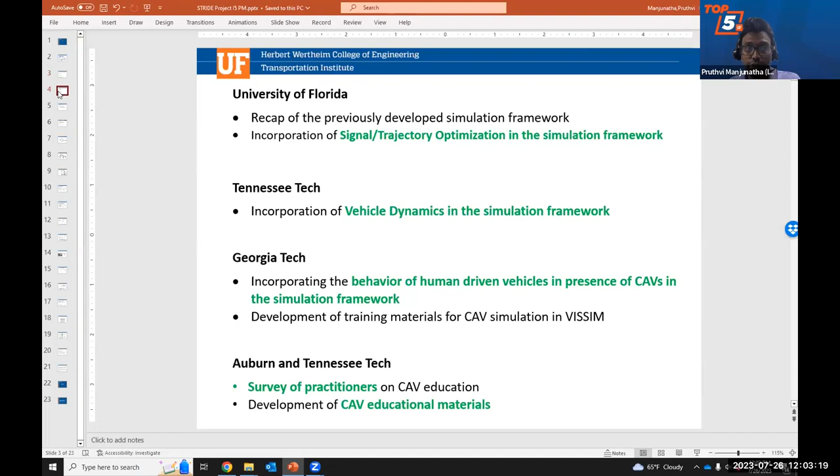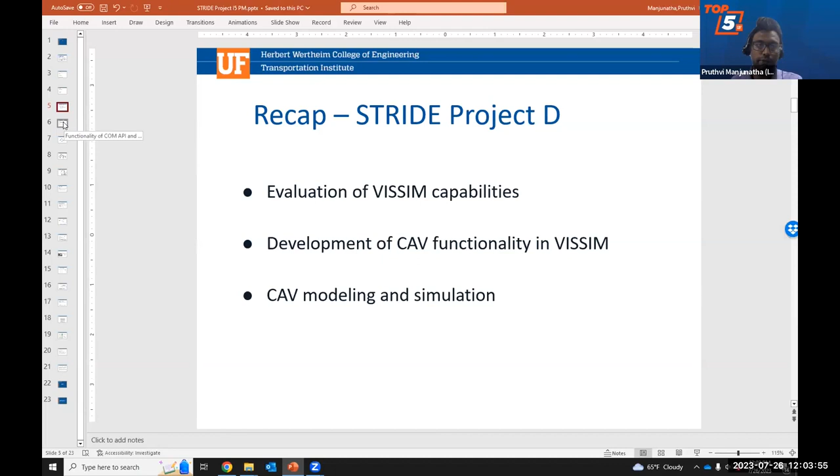This project builds on an existing VISSIM simulation framework that we developed a couple of years ago. So when we started that work, the idea was to evaluate VISSIM capabilities and see how best we can model CAVs in a simulation framework using VISSIM. What we found was, we can take advantage of 2 functionalities that VISSIM offers. One is the COM application programming interface, and second is the external driver module.

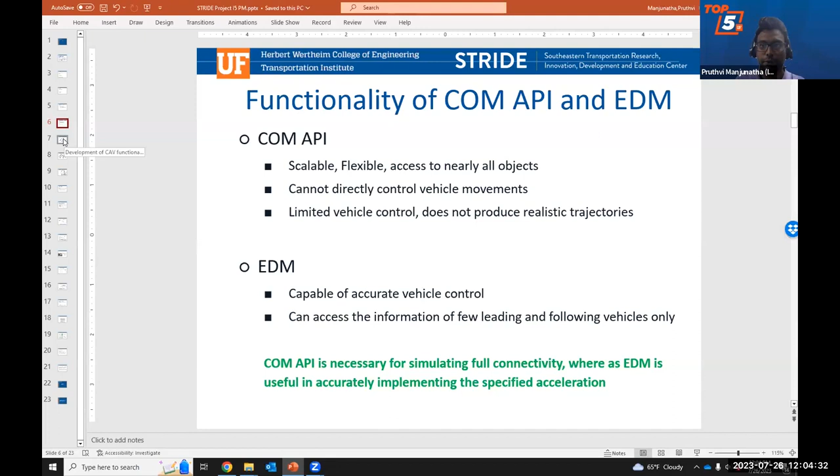The COM API is helpful to access all the network elements during the simulation, whereas the external driver module is very good in accurately implementing specified acceleration or speeds for a given vehicle. So using a combination of the COM API and the external driver module, we came up with this framework for simulation where we capture all the traffic data using COM API every simulation second or interval. And then we feed it into whatever AV or CV logic one would like to run.

And then the acceleration for all the vehicles that are being controlled would be inputted to COM API and then written into a text file, where the EDM picks up the text file and implements that for those vehicles every simulation time step. So this is the basic framework.

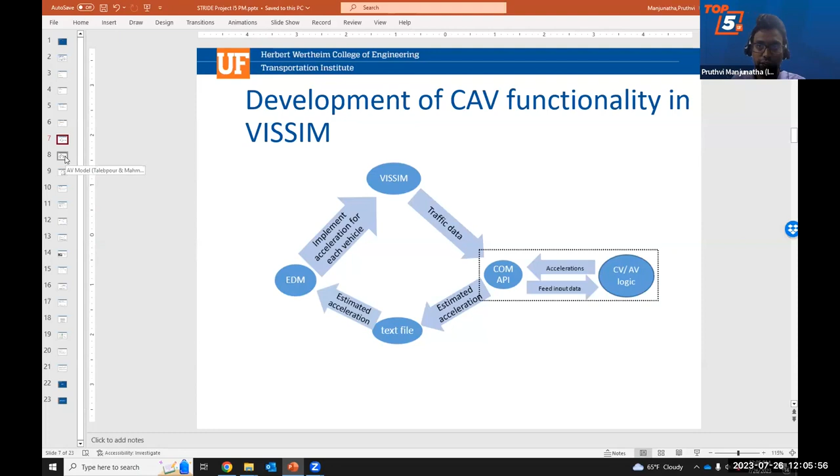So we started with this simulation framework, and for this particular project that we're going to talk about today, we had 3 different types of upgrades to this simulation framework. When we completed this evaluation, at the time, we just used an AV model from the literature and then a CV model based on what PTV had. And we ran this in conjunction with an emissions model that was developed based on the MOVES model by Georgia Tech. So that was the previous project.

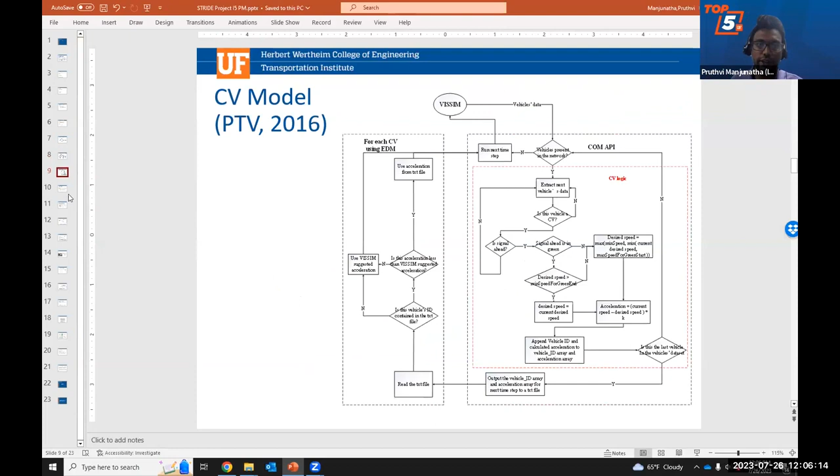What we did in this project was we added the signal and trajectory optimization component, we added the vehicle dynamics component, and we added the human behavior into this. So first, from UF, I'm going to talk about how exactly we incorporated the signal and trajectory optimization into this framework. For this, we picked up an optimization system that we are familiar with because we developed it here at UF. So this is basically the signal and trajectory optimization framework.

There is a link to the published work if you're interested. Essentially, we developed this to be implemented in the field. We have actually done some field testing with this framework as well. The summary of this framework is basically there is the sensor fusion system that takes in all the information of vehicle arrival through different sensors. Once we have the vehicle arrival information, we have something called an intersection control algorithm that will do the optimization and produce optimal signal plans as well as optimal trajectories.

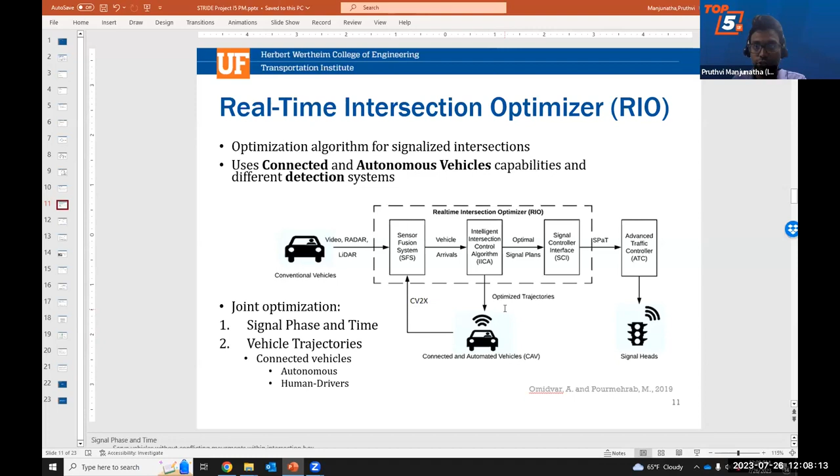So the optimal signal plan will be implemented at the signal controller, and the optimal trajectories are the trajectory recommendations sent to the CAVs. If we were to implement this in a simulation framework instead of the signal controller, we would be sending this to the signal controller within the VISSIM simulation framework. And the optimal trajectories have to be implemented in VISSIM using the external driver module because of the reasons I mentioned before. So how would we go about implementing that?

So this is how the modified or updated simulation framework looks like. We still use the COM interface to get all the traffic information and vehicle arrival information every time step into our optimization module. There are two types of optimizations happening: one is the signal optimization and the other is the trajectory optimization. The signal optimization is sent back into the COM interface to be implemented using VISSIM's signal controllers, and for the trajectory optimization, we write it onto a text file that gets picked up by the external driver module.

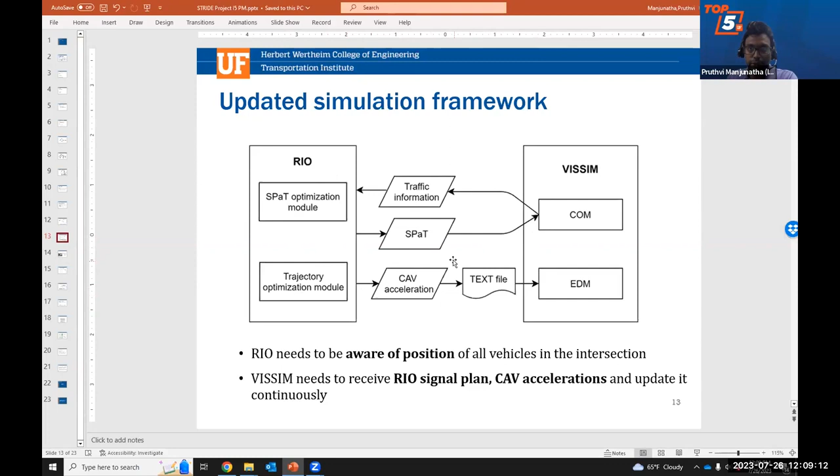So what are some of the challenges? To begin with, to make sure this particular framework is working, we used 100% CAVs to test as a proof of concept. We use the same four-legged intersection that we used in the previous project. To keep it simple, we just used a two-phase signal plan, and then we tried to compare the performance in terms of delay with VISSIM's signal plan versus an optimized signal plan.

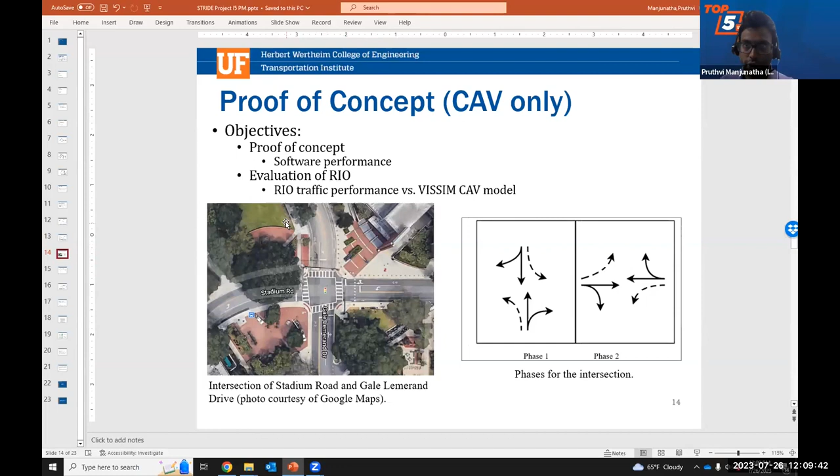This is what we had with the 100% CAV. So we had 6 different scenarios with increasing demand levels. First 3 are evenly split 50-50, and the next 3 are 70-30, with 800, 1600, and 2400 vehicles per hour as the vehicle network demand.

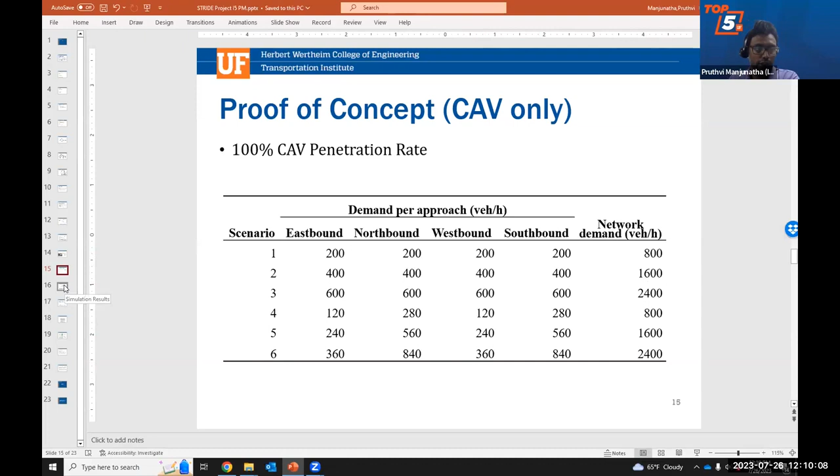So in terms of simulation results, for every single scenario we had an improvement in delay. Delay reduced in each of the scenarios with at least 30% improvement, and we saw more improvement when the demand was evenly split over a 70-30 split.

Some of the problems we encountered are like the simulation runs very slowly, sometimes at or even slower than real time. The reason is the way in which we send the information of vehicle accelerations from the optimization module to VISSIM is through writing on a text file. So that was the bottleneck that we found.

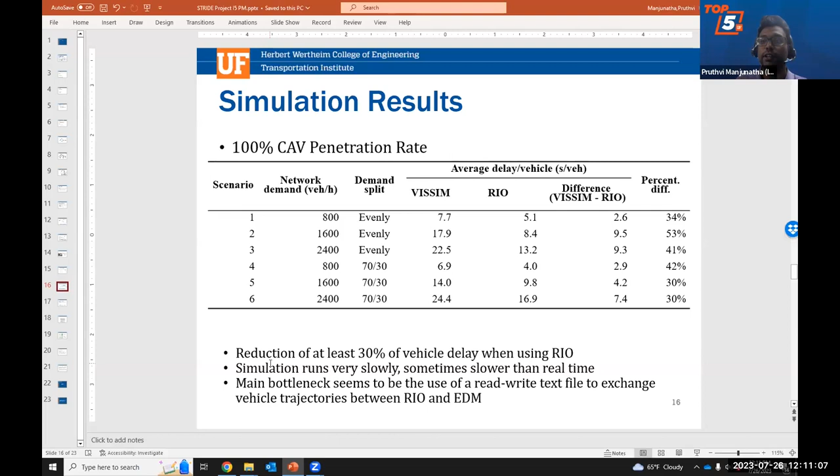So the next step was to now implement different combinations of CAVs, CVs, and conventional vehicles. What challenges would we face? There are a couple. One was that with RIO, because it was using an assumed car following model for the leader vehicle, I believe it was a Gipps car following model, it had a certainty of where the leader vehicle was going to be. Whereas in this framework, as long as it's a conventional vehicle, the vehicle type is defined as a conventional vehicle, VISSIM controls that, and there's no such certainty.

The second thing is within the optimization module, when the vehicle gets closer to the stop line, the optimization and iterations stop, and the recommended trajectories get locked in. This works very well as long as the vehicle is a CAV and it will implement the recommended trajectory exactly as prescribed, but it doesn't happen so with conventional vehicles that are controlled by VISSIM.

So the solutions were to keep re-estimating the departure times for those vehicles, and then adjusting the network state, and also not locking the conventional vehicles with a certain trajectory, no matter how close they were to the stop line. Of course, this meant more calculations and further slowing of the simulation speed.

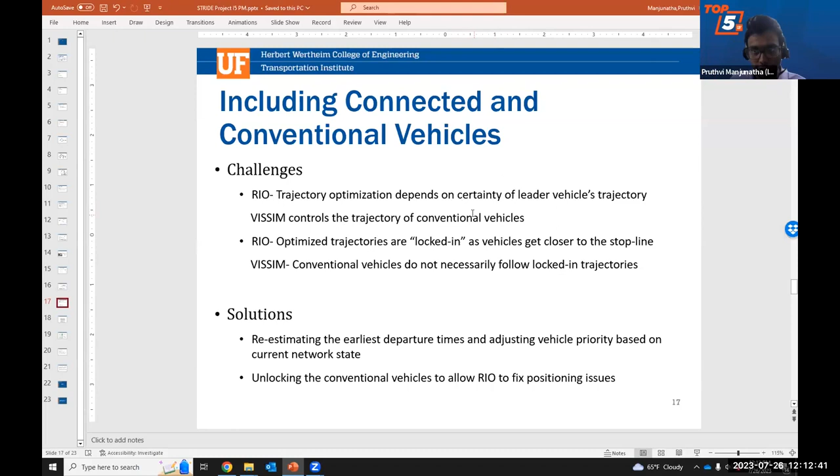To test this out, we came up with 11 different vehicle mixes with different percentages of CAVs, connected vehicles, and conventional vehicles, and 4 demand levels from 400 to 1600 vehicles per hour, and then 2 demand mixes, one even mix of 50-50, and then one at 70-30. This resulted in 88 different combinations, and each combination we ran it 5 times for multiple runs.

I have some results to show here. Due to lack of time, I'll only be showing one set of results, but I will highlight different findings from particular sets of results.

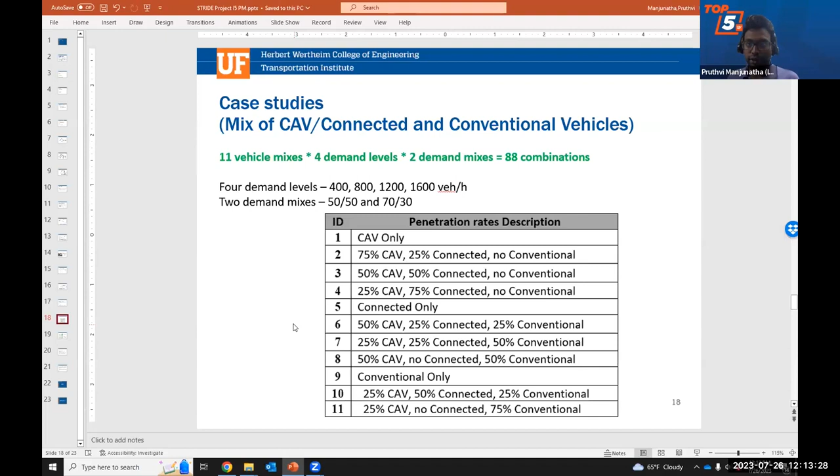One thing you notice on this table gives the delay difference between a VISSIM operated signal control versus RIO, or the signal optimization software operated signal control. When you consider the average improvements across all the scenarios, all 88 combinations that I mentioned, they're all positive. That's good news. There might be a negative in a few scenarios, reflected in the minimum improvements you can see on the left side, on the first column.

Some of that is because when conventional vehicles get stuck in a simulation, VISSIM has a 60-second rule where by default those vehicles disappear, whereas in the optimization it doesn't. So there's a discrepancy causing some bottlenecks and delay times not improving. We reran some scenarios with different random seeds so that vehicles stuck, which are not removed artificially like VISSIM does, are not counted.

In general, all the scenarios at the top of your table are CAV heavy scenarios. So the CAV heavy scenarios have better performance compared to other scenarios in general.

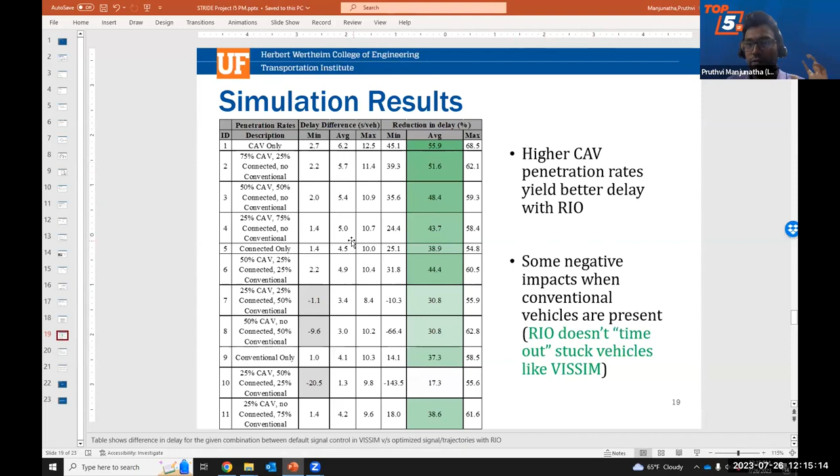Some other findings we found when we tried to redo this table with certain types of demands or vehicle mixes: in general, like we saw with the CAV only case, the signal optimization software works better when demands are evenly split.

Also, with higher percentage of CAVs, RIO performs better across all demand levels, irrespective of demand. Whereas when conventional vehicles are higher, the performance is only good at lower demand levels. So a mix of higher percentage of conventional vehicles and higher demand levels is not a good recipe to get good improvements with at least the signal optimization that we used.

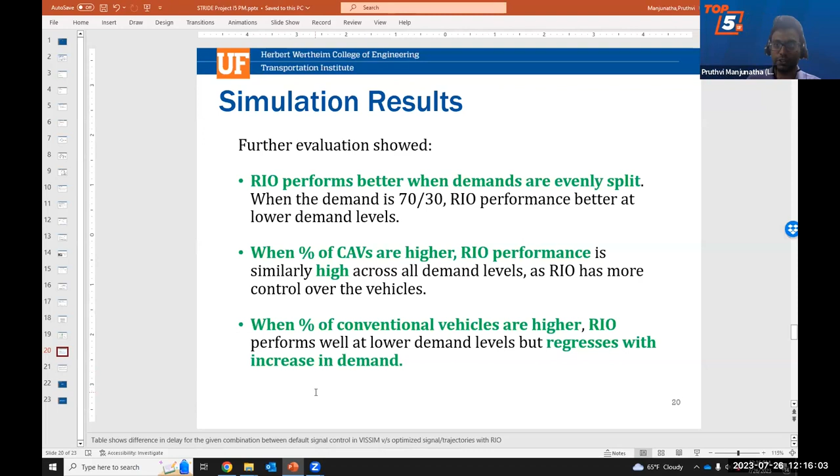So the conclusions from UF's work are: the initial implementation of the signal optimization module with the modified or updated framework is working, and we were able to successfully run with different types or combinations of vehicle types. The way we ran this whole system is very modular, so if someone wants to use their own signal optimization algorithm, they can use our existing modified framework and plug in their own signal optimization framework.

We did observe slower and slower simulation speeds as the scenarios get more complex. The main reason is our accelerations are being written onto a text file that has to be read by the external driver module. We tried to investigate whether we can do it in better ways. Due to time constraints we couldn't explore it further, and Georgia Tech helped us as well. We tried to see if we can use other functionalities that VISSIM allows to transfer information about vehicle accelerations from the optimization module to the EDM in a better way.

Some more work can be done in this area so that computation is not a problem. Finally, we only considered vehicle demand, and in the next iteration of this framework we can include pedestrian demand as well.

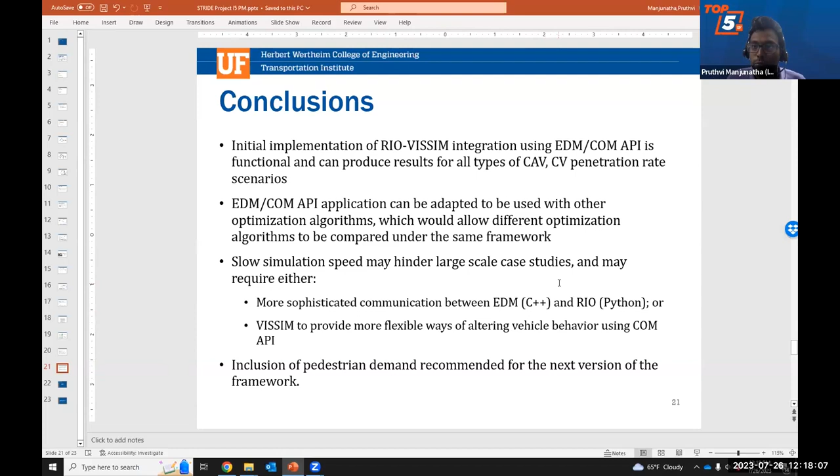This part of the project, I'm going to discuss the incorporation of advanced vehicle dynamics modeling for connected and autonomous vehicles within the microsimulation environment. This part, as Pruthvi mentioned, was conducted by Tennessee Tech University under the supervision of Dr. Arman and Dr. Shireen. This task mainly focuses on enhancing microsimulation performance by accounting for vehicle dynamics, which will provide more accurate individual vehicle performance that can be incorporated with the microsimulation environment. Several parameters have been accounted for in this simulation modeling, including driver characteristics, the vehicle body for different cars and trucks, as well as the powertrain, operational environment, and operational modes.

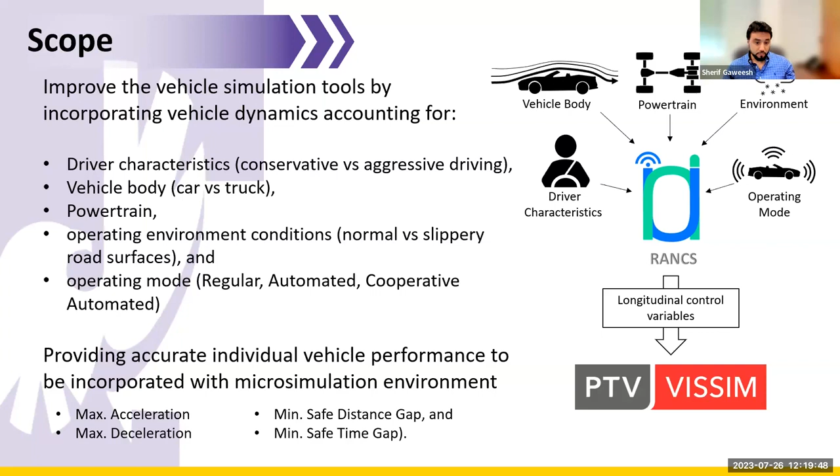The vehicle dynamic model will provide distributions and performance curves for maximum acceleration, maximum deceleration, safe distance gap, as well as minimum safe time gaps that could be used within the microsimulation environment.

To this end, RANCSim, which is the vehicle dynamic simulation tool, was used to model and simulate the vehicle dynamics of 10 different passenger vehicles as well as 4 different trucks. It accounted for different operational modes and several driver characteristics. The vehicle powertrains used in this simulation tool were derived from the provided website automobile-catalog. The vehicle dynamics have been tested using the US06 supplemental federal test procedures for passenger cars, as well as the Cycle D for trucks, which are two common and well-known models for the performance of passenger cars and trucks.

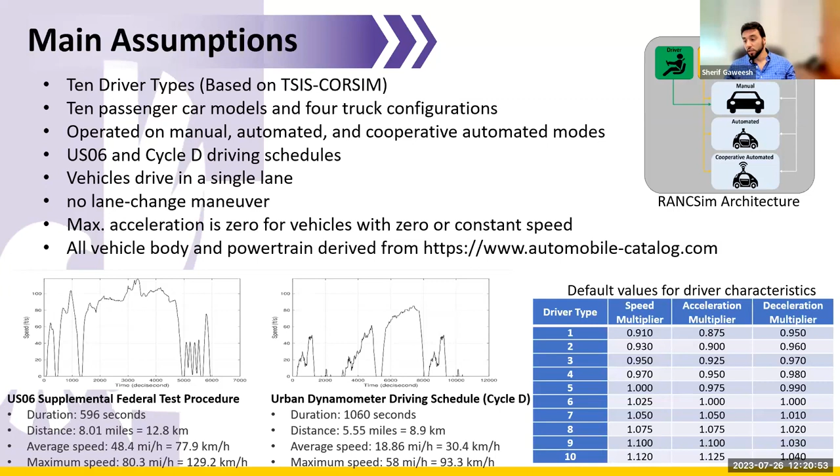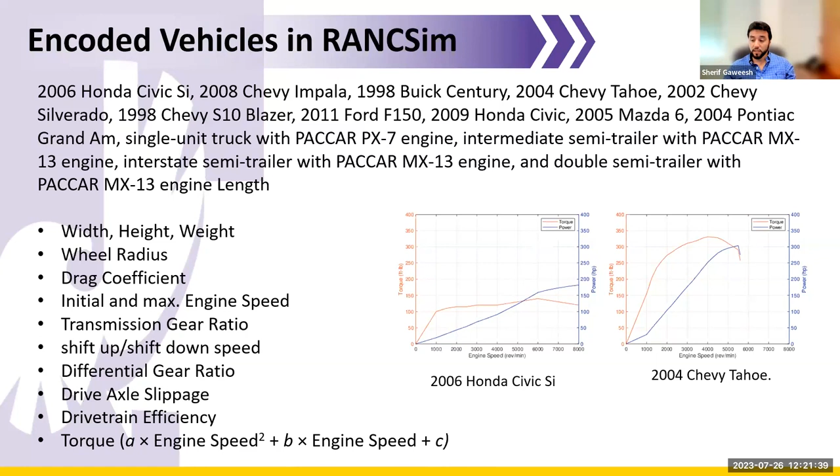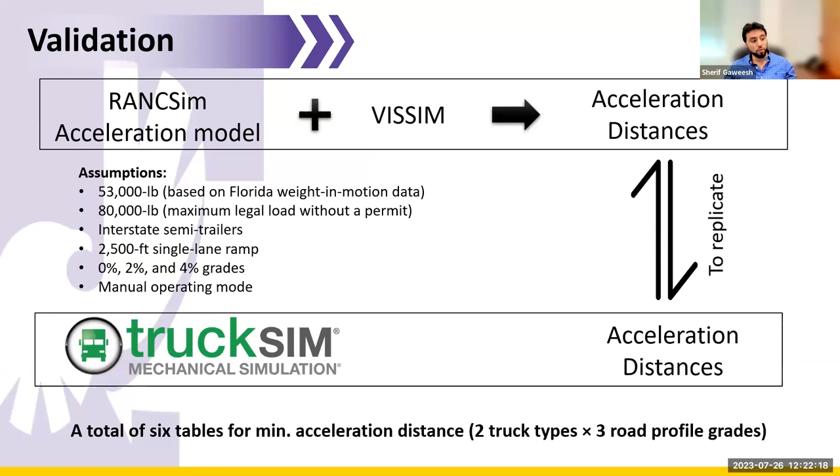Validation and calibration for the developed vehicle dynamic simulation were conducted, in which TruckSim and CarSim were used to validate the performance of the simulated vehicles using acceleration distance, making sure the values were replicated from the different TruckSim and CarSim modules. Several assumptions were utilized as provided in this list, and we tested them in different grades within the roadway profile.

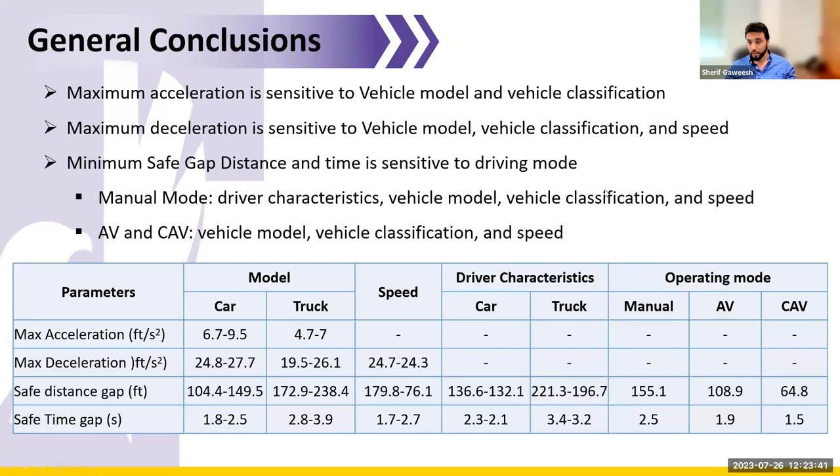So this would generally conclude the different distributions and ranges that can be utilized within the microsimulation environments like VISSIM, which can be inputted to simulate the different vehicles while accounting for vehicle dynamics. With this, I'll conclude the vehicle dynamics part, and hand it back to Pruthvi.

Thank you so much, Sherif. So those were the first two changes that we did to the framework: the first is signal and trajectory optimization, and then the vehicle dynamics.

The third change was to model human-driven vehicle behavior in the presence of CAVs. For that, we have our Drs. Michael Hunter and Angshuman Guin from Georgia Tech. Dr. Hunter, thank you.

So next we're going to talk a little bit about considering the human-driven vehicle side of the AV equation. The folks working on this project are myself, Dr. Guin, who is also on the call, and James Abay, the student who worked on it, has graduated and is off doing great things in industry now.

Just a very quick background - I'm not going to get into all the different pieces of literature, but when you look at a lot of the AV modeling out there today, the two most common customizations tend to be that AVs are assumed to be very cooperative with conservative behavior, and that human-driven vehicles are usually assumed to be very cooperative too, treating an AV as if it's just another human-driven vehicle. And that may not be true.

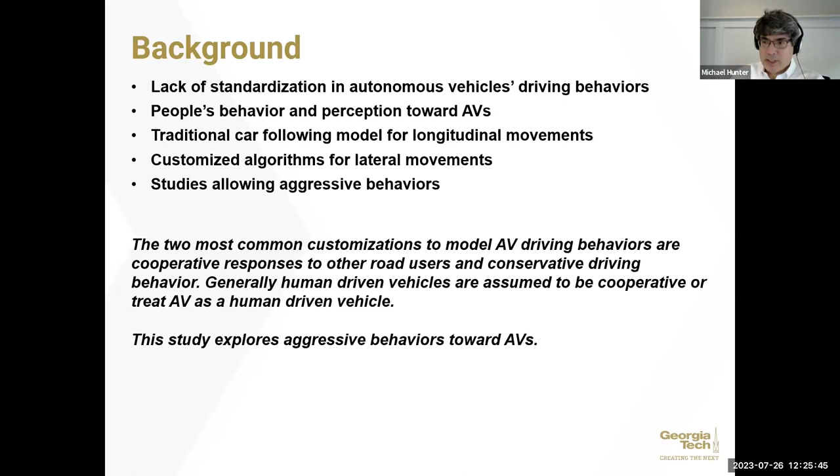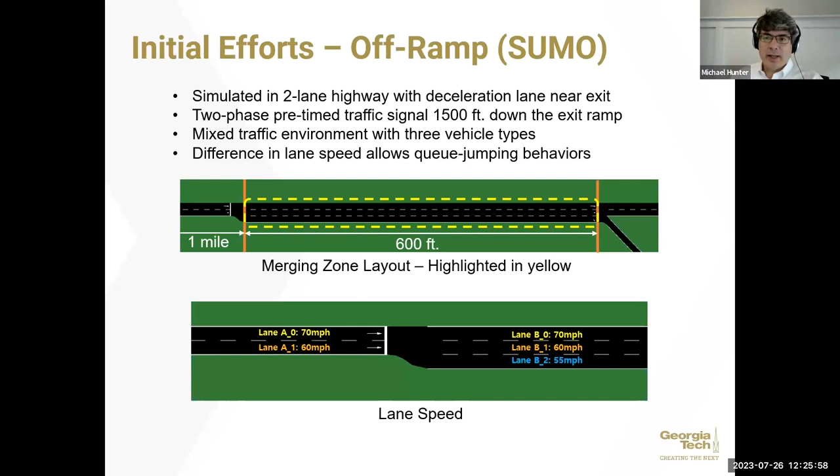This builds off some initial efforts we did using SUMO, looking at an off-ramp and trying to see what would happen with aggressive vehicles in the fleet. In that case, and in this version, we break it up into 3 different vehicle types: one is the autonomous vehicle, assumed to be cooperative; a human-driven vehicle, also generally assumed to be cooperative; and an aggressive human-driven vehicle. So we break the human vehicles into 2 categories.

One, more of a cooperative, that's the general assumption of most of the research today, and the other is a more aggressive. And in our version of aggressive, we're doing 2 things. One, we have them target the AVs. So the aggressive human vehicle, when it's trying to merge, it will go as far down the main line as it can, and essentially cut off an AV and get its maximum advantage.

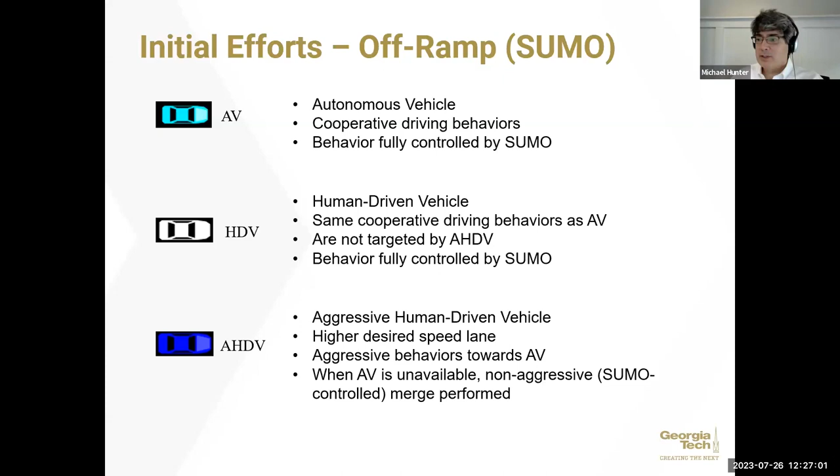And then the other aggressive part is when it cuts off, it will use very, very small gaps. And actually in the Vissim version, which we'll talk about, it will use basically no gap. It'll just force its way right in front of an AV and force that AV to hard brake if it needs to. So that's what we're really trying to look at, that impact.

Overall, on the off-ramp, when you look at averages, things don't seem to change all that much, but what really changes is who's receiving the benefit and who not. So travel times become very bimodal, with the aggressive vehicles really reducing their travel times, and the penalty being paid by the AVs and the regular human-driven vehicles, because they're caught in that same traffic stream. So if they're caught behind an AV that is being cut off, well, they're going to pay the same penalty.

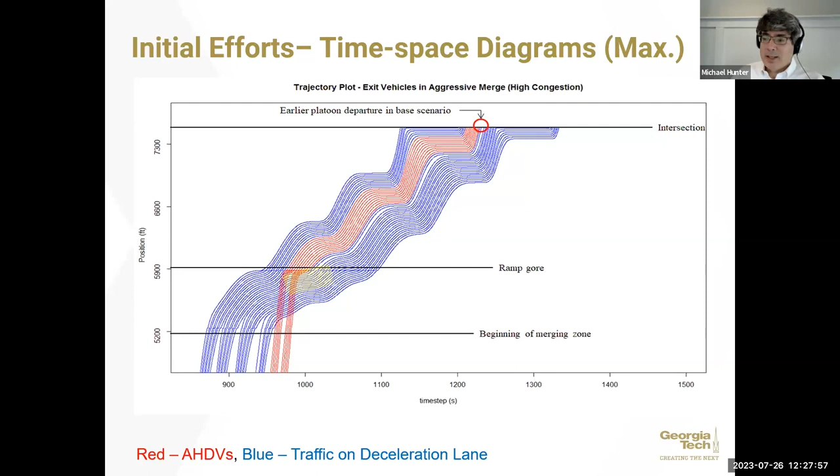So we decided to flip this around and look at, okay, what would happen, maybe some capacity impacts, looking at an on-ramp situation. So now we're going to have an on-ramp, and we're going to look at sort of a worst case. We're really trying to break out the parameters and understand what the variables are. So we look at a single lane main line and also a single lane ramp. And then we're going to have the ramp essentially merge in.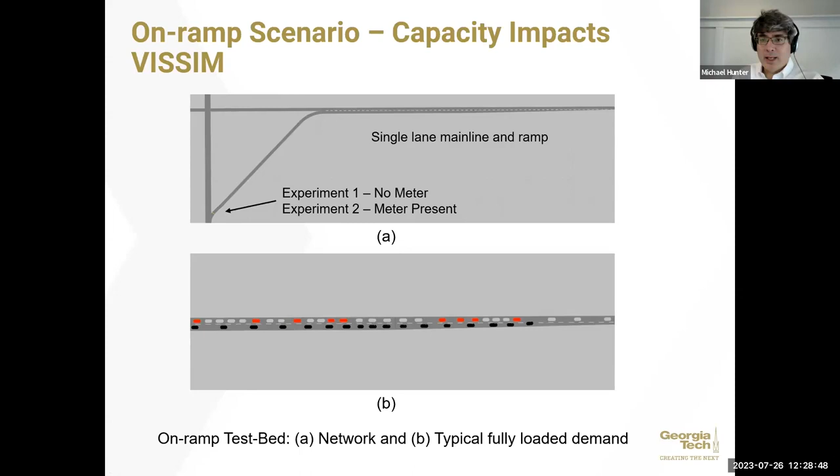We are going to do 2 sets of experiments here. The first experiment assumes that there's no meter on the ramp. The second experiment, we're going to put a meter present to see if we can mitigate some of the effects we saw early on. And the experiments are going to be very directed at capacity. So we're putting way more demand on this thing, from both the ramp and the main line, than we know it handles, because what we want to see is how much traffic can you push through the ramp junction.

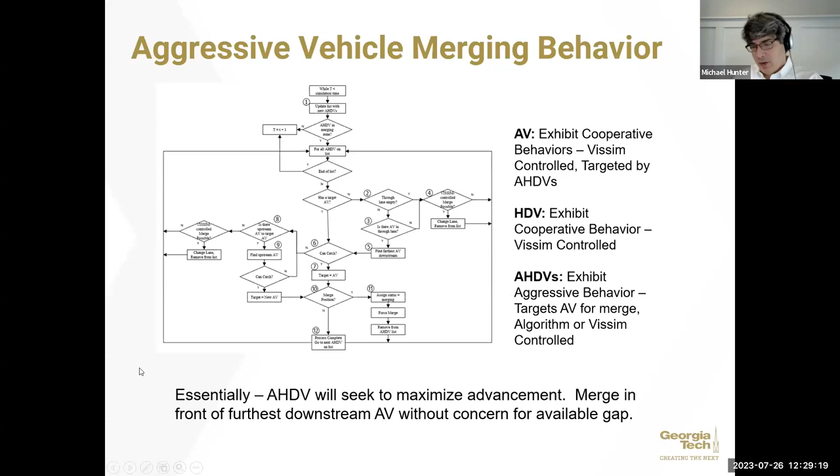To do this, as I mentioned, now we're in the VisSim world, so we're on the platform that we've been talking about. We have an algorithm to make this work. We've got our AVs, HDVs, and AHDVs. AVs and HDVs are generally similar in terms of how we're modeling them. They're cooperative. AHDVs, we're not using any cooperative behavior in VisSim, and we're targeting. So essentially an AHDV will seek to maximize its advancement, get as far down the ramp as it can, and then cut off an AV.

As Prithvi already mentioned, there's a few components here that we have to work with. We're doing the component object model and the external driver model. You've got to use the COM, because it's capable of looking at all the attributes. You can get vehicle speed, lane position, type, essentially the objects of your VisSim simulation. Although it does have limitations: it can read most objects, but it cannot write to most objects. And the limitations are greater when you're in runtime. For instance, we can't force a merge, say right now, change lanes.

To do that, you have to use your external driver model, which, as you've seen, is typically what you'd use if you want to do your own custom car following model. We've also added in a user-defined attribute. The user-defined attribute is a newer VisSim feature that allows you to create your own attribute, which we do, and we use it as a flag. So we use COM to do all the targeting.

Once the targeting is all set, and it's time to merge, then we change that user-defined attribute that will turn the flag, and then the EDM says, oh, my turn, and the EDM will force the merge. The thing behind all this that is somewhat important is that you can't do this by just changing the vehicle parameters. I know, for instance, that VisSim has an AV. That only works if you're living within the basic underlying car following model and you want to just calibrate it.

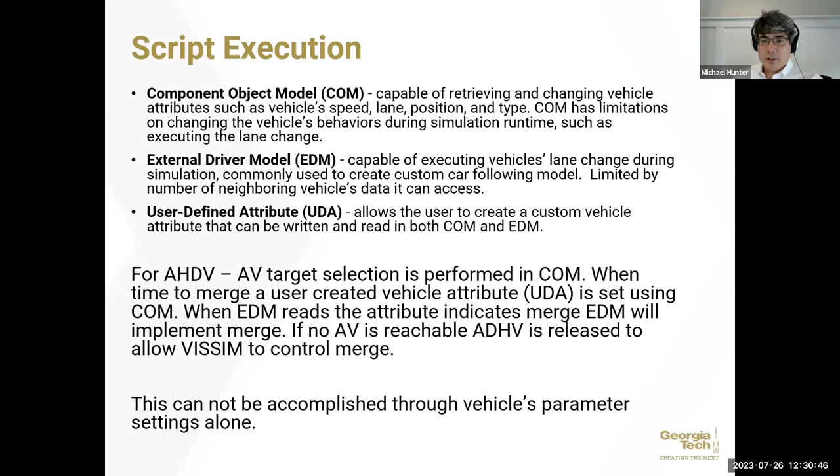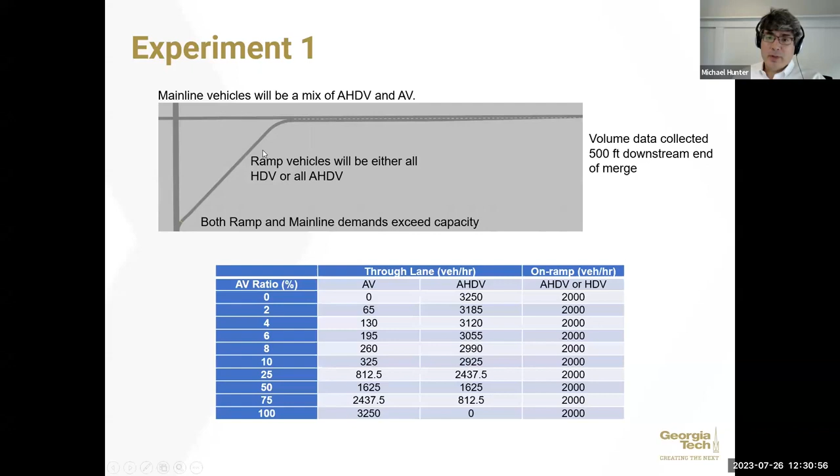Here, we're really trying to change the behavior. We're saying we want to target. You do that, you start getting into all these things. So like we said, there's two basic scenarios. In one scenario, all the ramp vehicles are human-driven cooperative. In the other scenario, they're all aggressive, not very cooperative.

And even if there's only a couple percent, they essentially just form these giant platoons of aggressive vehicles, and the same AV might be cut off by 100 aggressive vehicles just going in, going in, going in. Now we know we've kind of built this to be sort of a worst case, but it's this idea that the AV basically kind of gets stuck, and they just keep getting cut off.

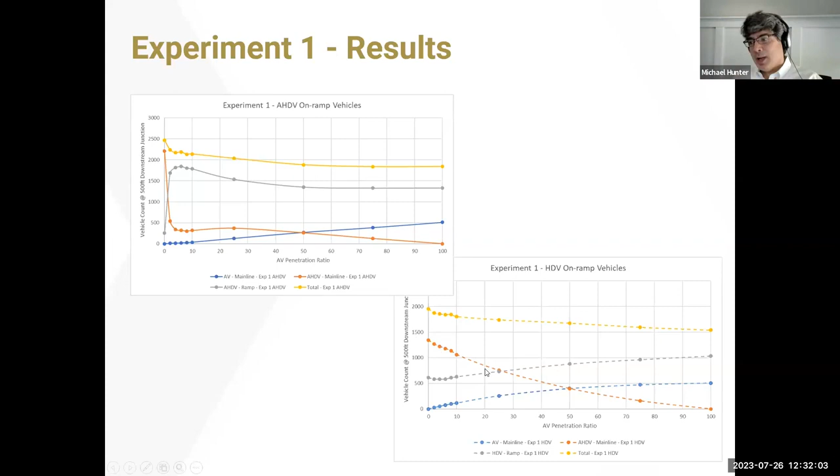And if I move this traffic where it's not aggressive vehicles in the ramp, basically as we're modeling in most of the work today, then you'll see that doesn't happen, and that there's more of a balance down here, and that the main line still keeps its traffic moving, and the ramp is putting some on as well. But if people get aggressive, so here's sort of another way to look at this, solid is aggressive, the dotted is not aggressive.

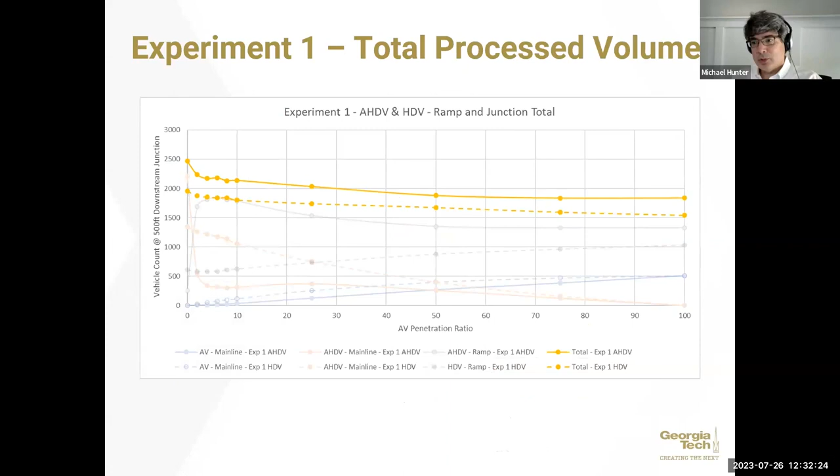The aggressive does increase overall junction capacity. So that's what this is, your overall junction capacity, which kind of makes sense because the aggressive are basically creating some much smaller gaps. So you're going to get a little more traffic in. But what you're going to see, solid line aggressive, dotted line not aggressive, on the main line, is that even at a very low percentage, that main line is going to get pushed way down, and the ramp is going to push a lot more.

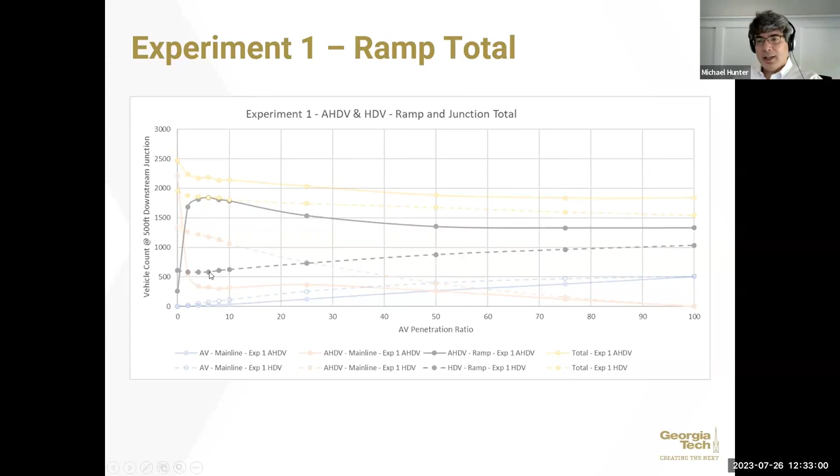So this is the ramp traffic. I go from no AVs, I don't get much ramp traffic on, to just 2%. I get a ton more traffic on from the ramp, but I've essentially shut down the main line, which is this solid line, so the main line is not able to process more traffic. But if I look at the ramp, again, when they're not aggressive, I'll actually get quite a few fewer vehicles on the ramp. So same deal, you're going to see this endless trade-off.

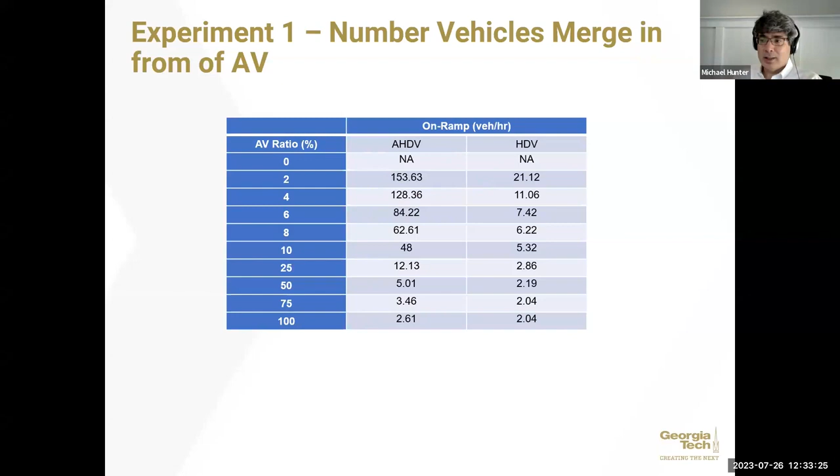Part of that, like I mentioned, is we also counted how many vehicles would cut in front of a single AV. So when there's only 2% AVs out there, if cars are aggressive, you get a lot of cars just trying to cut in front of it, whereas when they're not, you're going to start to see some balance. And that's going to balance out too as you get more and more AVs, because there's essentially more and more targets to choose from.

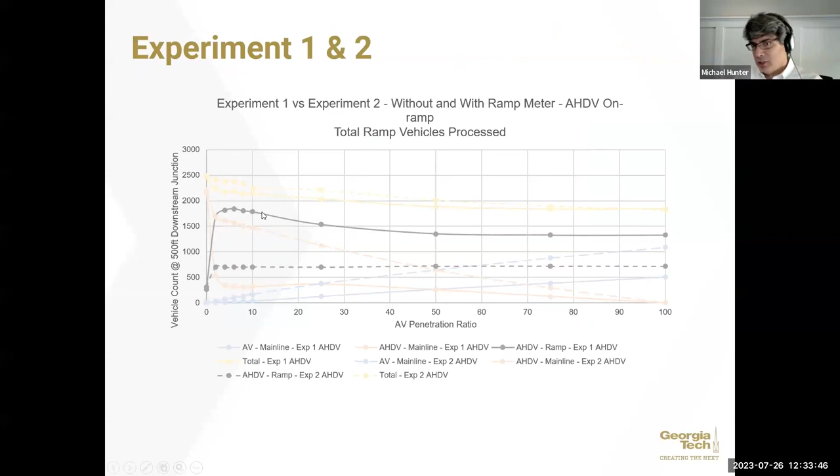So what we did then in the end was we added a ramp meter just to see, and I'm going to very quickly do that. You'll see when you put the ramp meter in, the total junction throughput stays about the same. Actually, the ramp meter buys you a little bit, but the big difference is, so this is the aggressive vehicles on the ramp, where before without the ramp meter, they just took over and shut down the main line. Now what happens is you're limiting the number of vehicles that can get on that ramp.

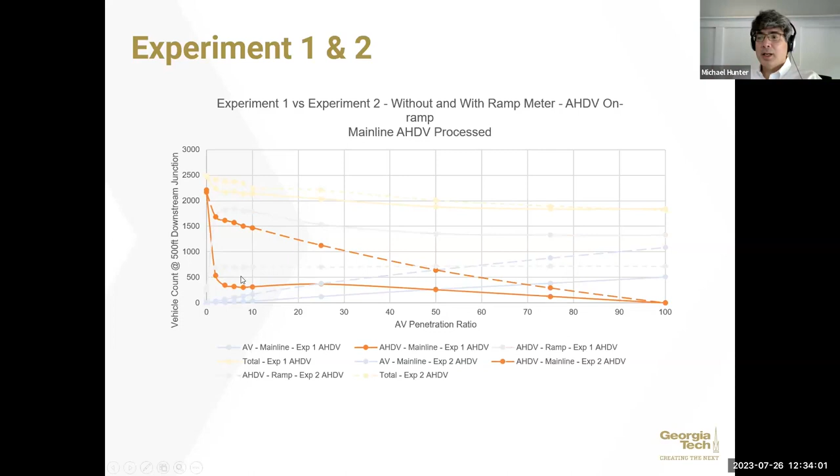So you're going to limit the number of vehicles that are able to cut off the AVs, and you can control that. And so now the main line, this is going to flip it. The main line actually will keep moving. So where we had no ramp meter, your main line was getting shut down; with the ramp meter, you can now sort of start to control those trade-offs and help the capacity as well.

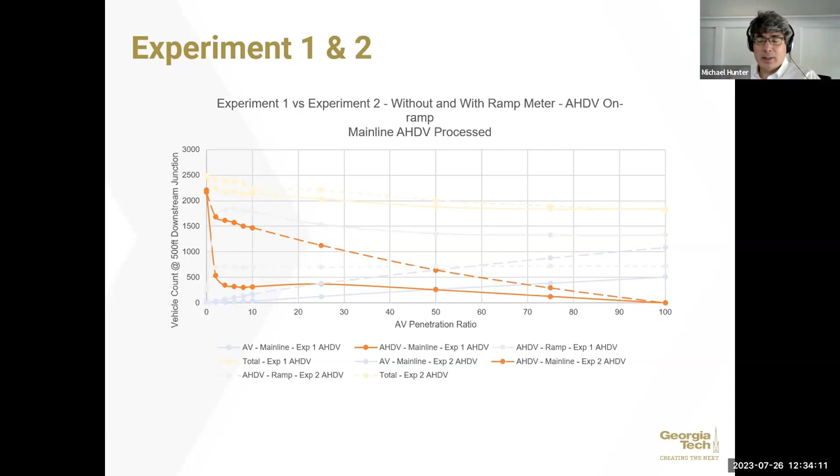We'll skip that. I know we're running a little long, so I'm not going to get too much into this. You really got to do this stuff with EDM and COM. So we actually have created some documents. For instance, we have a nice document that we're just wrapping up right now on how you would actually do something like this in EDM.

It's a little tutorial. So if you want to do this kind of stuff, it's very helpful; that first time you do it, it's very painful. So this sort of walks you through your initial application. Like I said, the biggest hang up in all this is you got to have somebody who knows C++, and they're becoming fewer and far between. We're not going to dig too much into that at the moment.

So what kind of walks away from this is it is really important that we start doing some of this kind of thing, because if we have aggressive drivers taking advantage of AVs, the aggressive driving really does have a potential to significantly impact both capacity and travel times that we're not capturing if we don't reflect the potential of those kind of drivers.

And the impacts are not experienced equally, right? So some vehicle types are really going to suffer where others don't. So you might look at average and say, oh, well, it's not that different. It might be significantly different depending on where somebody is in their experience. AVs may be essentially getting shut down on the road because they're being bullied, because they're being targeted.

So future impact, we need to consider this, and we need to start realizing that we might have to start putting out some mitigations like ramp meters and some other things, simply to help control that, to act as gates to avoid that.

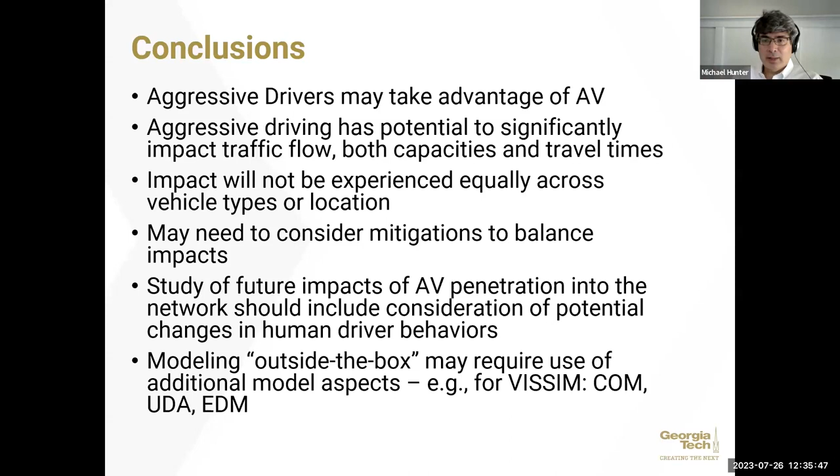And also when you're doing some of this modeling outside the box, like the platform we've been talking about, you're not going to be able to get away with just changing parameters in your Wiedemann models. You're going to have to look at how you handle the COM, look at how you handle the EDM. So we also use the UDA, which was kind of a creative way to sort of pass between the two of them.

This part of the task, this is task 6, Auburn and Tennessee Tech have been working on a task to develop CAV education material for transportation engineering courses, mainly for civil engineering students. This is what I'm going to present. The results from here: we conducted a national survey to try to identify the critical CAV topics for the civil engineering curriculum.

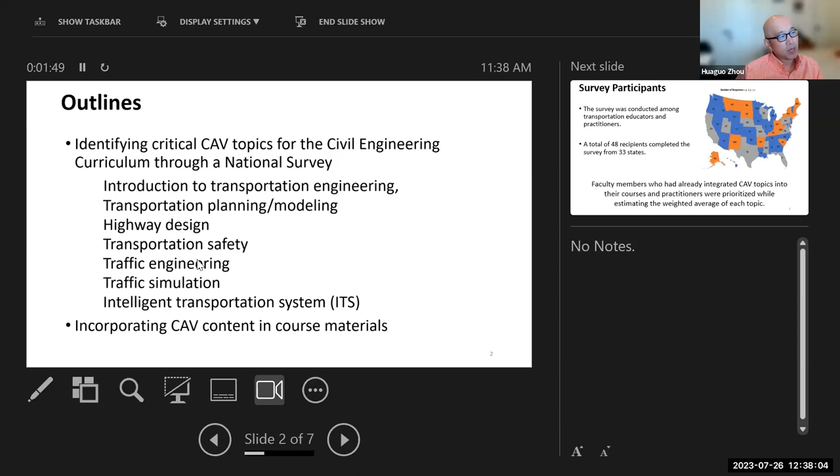So this material can be used by other professors at other universities, so each faculty doesn't have to spend a similar amount of time to develop similar material. So this is the national survey we conducted. We did an online national survey among transportation educators and also practitioners.

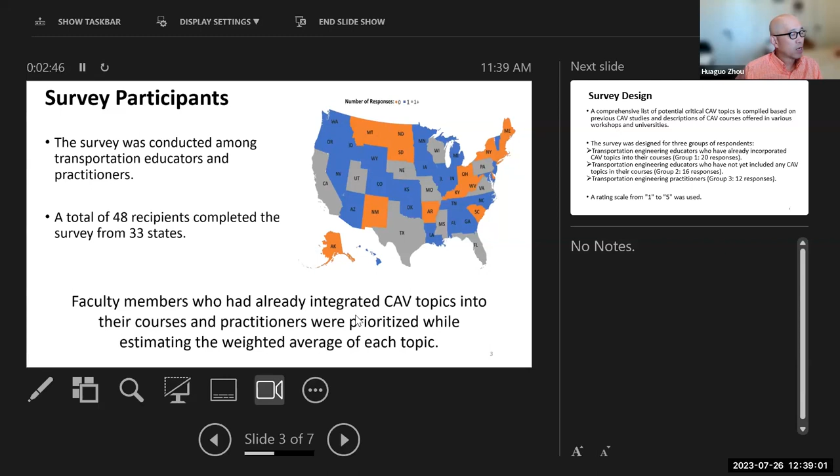We received 48 responses from representatives of 33 states, including some faculty who already integrated CAV in their class teaching, and also some practitioners who already taught some workshops on CAV. So we gave these two groups of responses a little bit higher weight when we ranked the topics. So this is the survey results.

First, we identified a list of potential topics to put in the survey. Those potential topics are based on a literature review, compiled from previous CAV studies or some existing CAV courses already offered by different universities and workshops. So the survey was designed for actually 3 groups.

So if the answer is they are a transportation engineering educator who already incorporated CAV into their course, they will be in group 1. So they will answer questions designed for them, slightly different than other groups. So we received 20 responses from this group.

And the second group are the transportation engineering educators who have not yet included any CAV material in their course. I don't know what happened at your university, but at Auburn here, we have not included any CAV topic in those transportation engineering courses. So we got 16 responses for group 2, and for group 3 we received 12 responses from practitioners. Some DOTs and some consulting firms already conduct some workshops related to CAV.

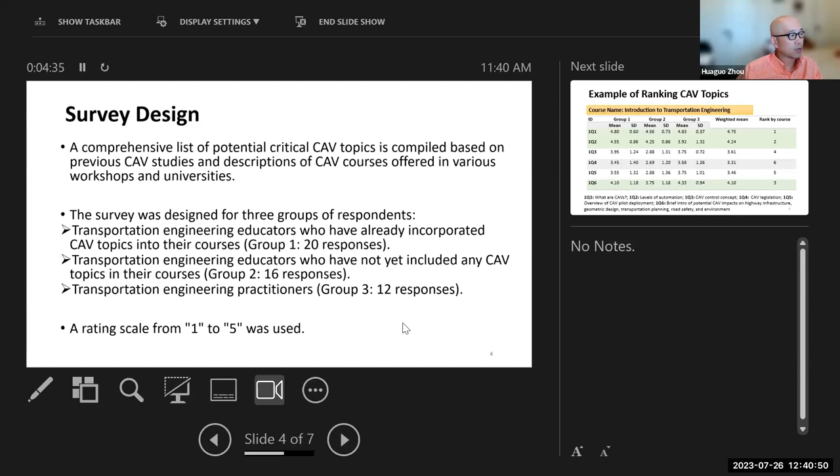So we ask them to rank the topic. For example, this is an example ranking CAV topic for the course name, for example, Introduction to Transportation Engineering course. What kind of topic do you think about CAV we should cover in this kind of intro class? So this is an example question.

What are the CAV level automation, CAV control concept, legislation, overview, CAV pilot deployment, and that's each group. You see, each group gives a ranking for them, and we give a weight for each group. Then we got the weighted average, and based on the weighted average, we can rank the topic for the class 1, 2, 3. For example, for this intro class, we select the top 3 ranking topics to include

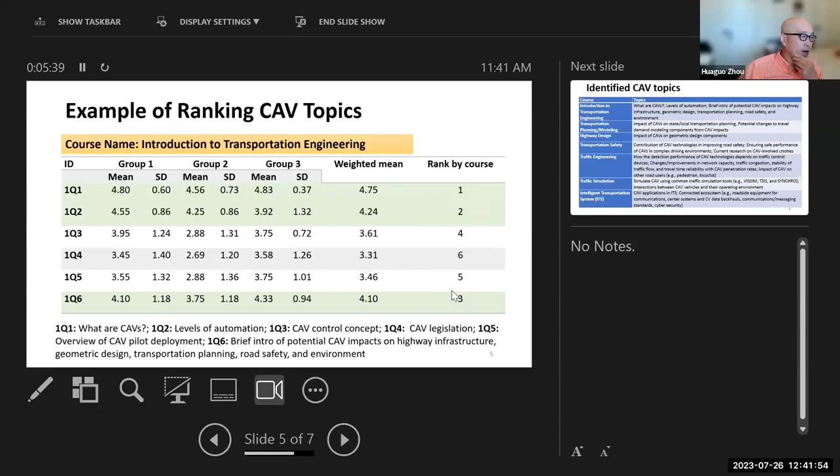in that class. So eventually, based on the survey results, we identify those topics for each of these classes. For the Auburn University team, we developed the material for the first 4 classes. Tennessee Tech developed for the traffic engineering, traffic simulation, and ITS course. So those are the topics for each different class.

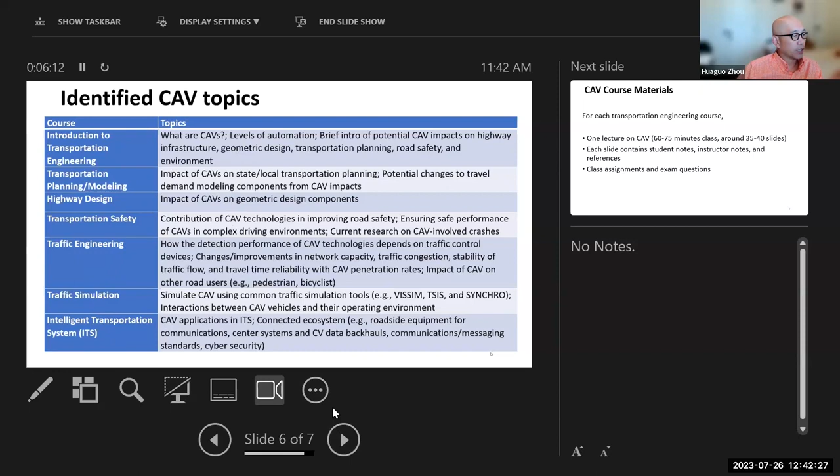The format for the course material has been developed for each transportation engineering course. We include the material for one lecture, about a 60 to 75 minute class, around 35 to 40 PowerPoint slides. For each slide's content you have student notes, instructor notes, and all the references. And also we develop class assignments and exam questions.

I believe after this project finishes, we can upload the course material to an online website, and anybody who wants to use it can download it to customize for your teaching purpose.

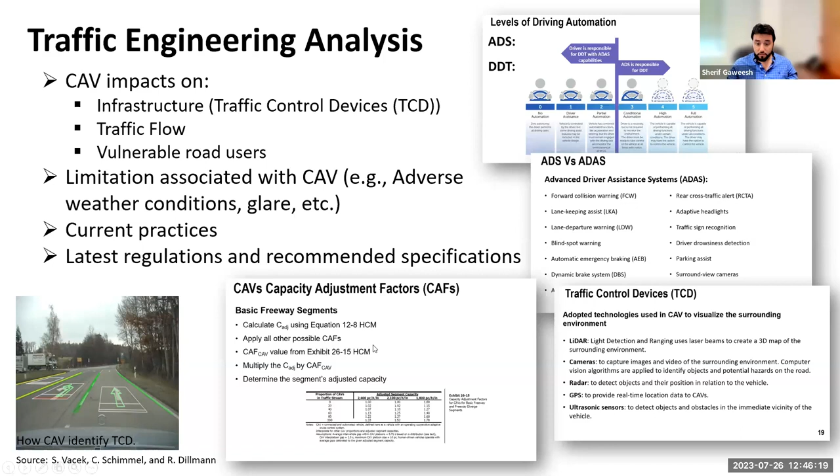The course also presents the different limitations associated with CAV deployment and testing, the current practices for CAV technologies, and the current regulations, recommendations and specifications in manuals or results of several task force committees as well. For the traffic engineering analysis course, for the infrastructure, markings, signs and signals were investigated. The effect of CAV on these different traffic control devices was highlighted.

The CAV technologies were investigated, providing information on how they can visualize the surrounding environment to operate safely and efficiently. What are the different challenges with CAV technologies? For example, low sun or glare, or maintenance or non-uniformity of the different markings and signs across the US. How are they going to perform in adverse weather conditions?

Several challenges like these were highlighted, as well as different recommendations, for example, from the National Committee on Uniform Traffic Control Devices, which has a specific task force to investigate what kind of enhancement needs to be provided for the current traffic control devices.

Moving to traffic flow, what is the effect of connected and autonomous vehicles on calculating the capacity of our roadways, on how to calculate the level of service, and so on? The latest Highway Capacity Manual highlights specific sections on how to account for the presence of connected and autonomous vehicles, with new tables for the adjustment factors for CAVs. And finally, within this course, I discussed